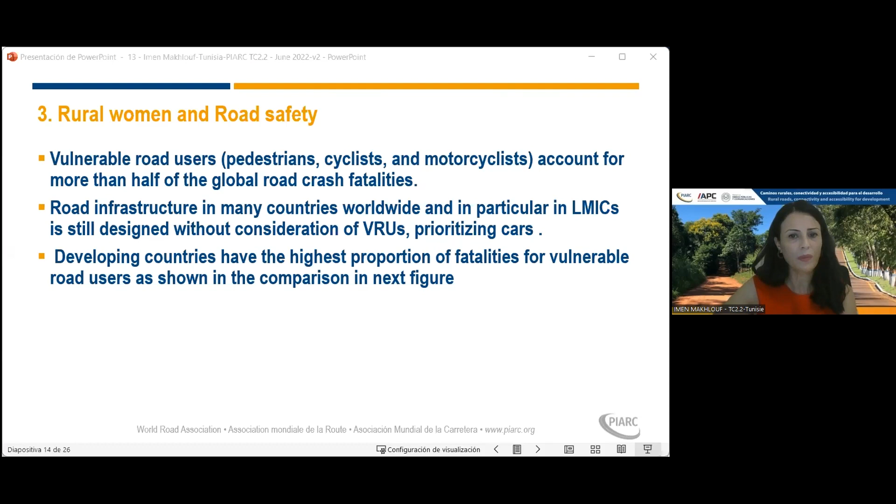According to research, women are also particularly vulnerable to injury and fatality on unsafe roads, as they are often traveling by foot or are passive passengers in vehicles rather than driving themselves. Therefore, they are more exposed to danger as compared to women in high-income countries.

Women are 47% more likely to be injured from road crashes, according to United States research. Women are 17% more likely than men to be killed in a road crash.

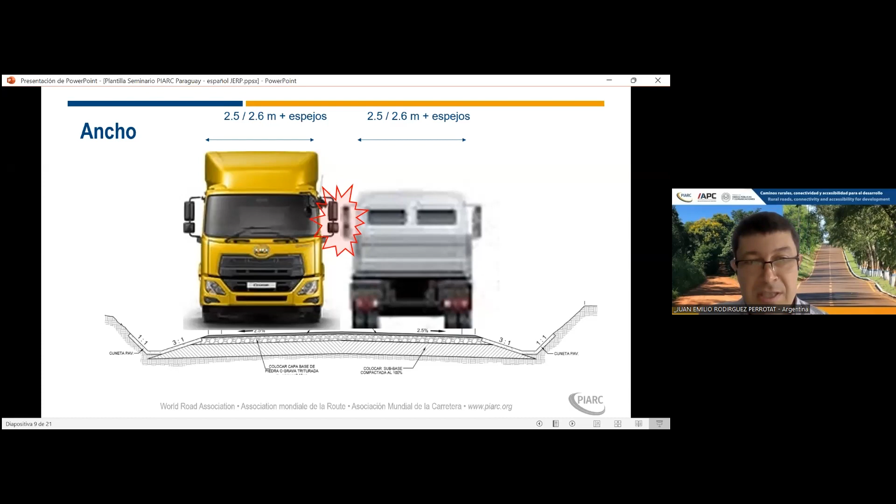Here you have some examples from countries in Latin America, situations that I was involved in. Here we were considering a cross-sectional approach, and we're talking about a road where we have cattle transportation vehicles, and what happened was that the widths were not adequate, especially, for instance, if transportation took place at night, dimensions were not adequate. This was also made worse by the side slopes.

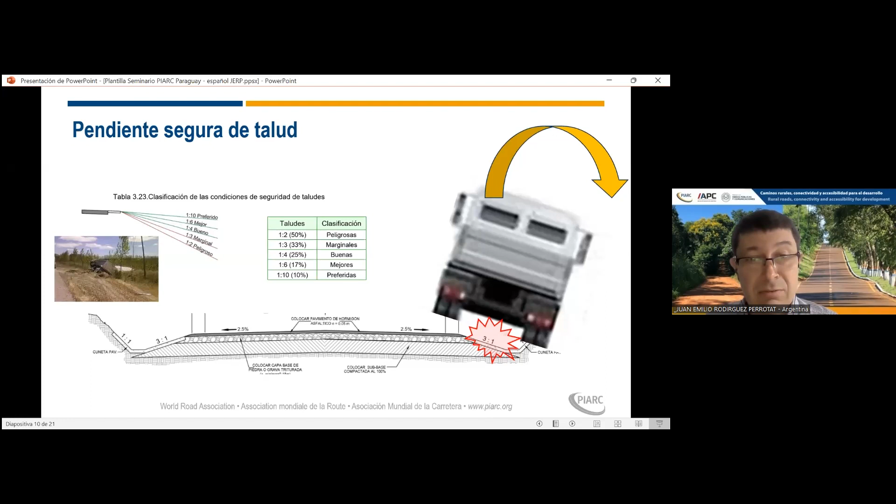Not only do we create a risk for life, but also a possibility of damaging the goods and the loads. So here we have an opportunity to improve our roads and prevent these situations from happening.

Eamon also talked about this, that in many cases this is the only way that rural populations can go from one place to another. These are some images from countries in Latin America. Some people walk along the sideways and the side slopes, and in some cases they are paved roads, but in other cases they aren't.

Sometimes designers don't take into account that people may use those side slopes, so there is a higher risk of being run over, especially at night. We need to work with people because they don't always wear the most appropriate clothing or walk in the safest way possible. So we have to be proactive, and through our designs we need to reduce the possibility of these accidents happening.

This is another project I took part in, in an indigenous community in Latin America. There was a rural road being improved, and we had to take into account that aside from motorcycles, vehicles or bicycles, we would also have people riding horses. So we had to consider if the side slopes or surfaces were appropriate for riding horses. There are also animals on the run, whether native or wild animals, or those belonging to cattle farms. We have to take into account the risk level these animals pose, especially at night.

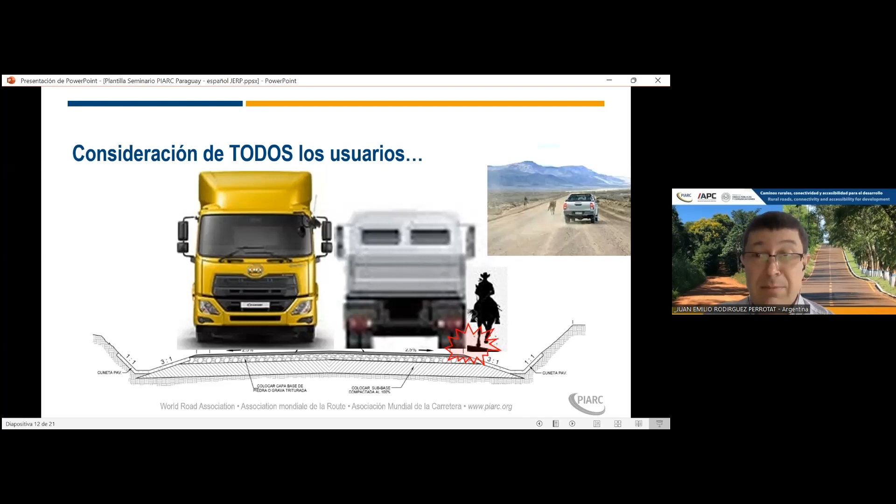And in fact, in Argentina, unfortunately, we've had this kind of situation happen.

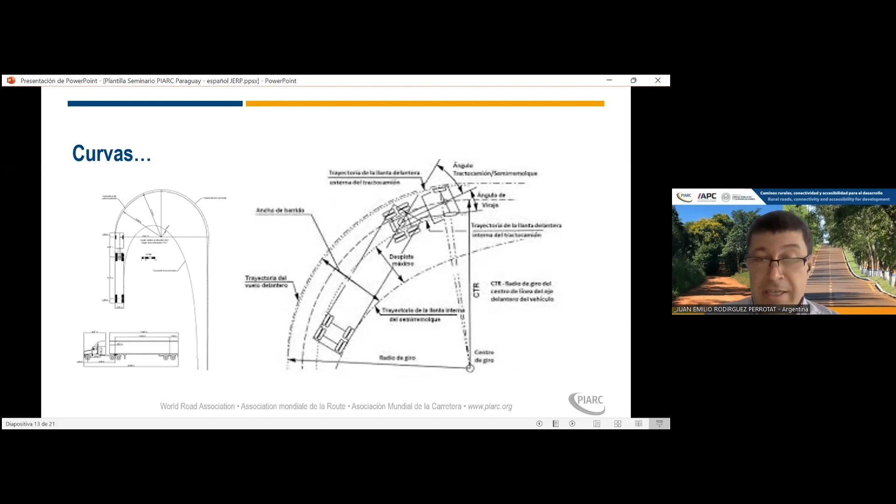Another important aspect, which I won't delve into deeply since I understand you'll cover it in another session, is that we need to take into account all kinds of vehicles. If we're going to have heavy goods vehicles or trailers driving on our roads, especially in productive areas where we have cattle that need to be transported, or coffee beans, bananas, or other produce, we need to take these aspects into account.

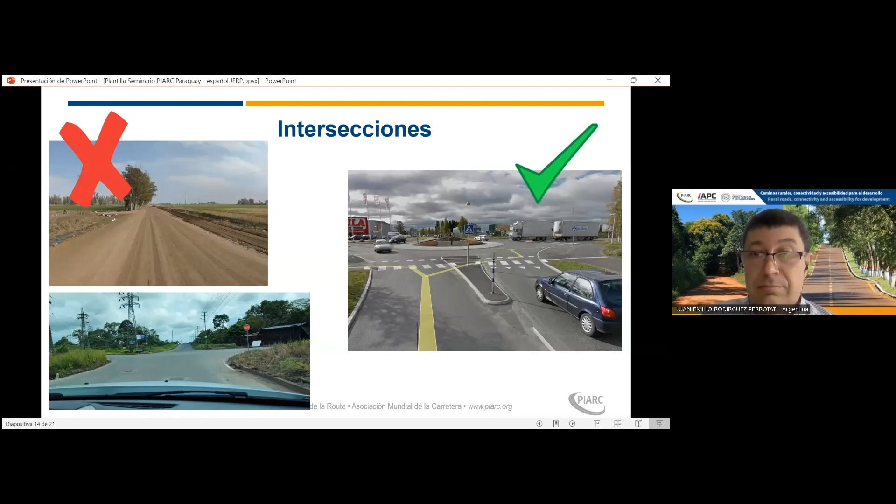As a road engineer myself, I say this as a reminder to myself too: we need to pay more careful attention to design so as to take a proactive role and make roads safer. I don't know if we'll eventually reach a situation like the one depicted in the second picture, but it's something we should strive towards.

Another situation that has led to traffic accidents has to do with the cross-sectional area of bridges, where we may not have good visibility and can't see if another vehicle is coming the opposite way. This situation is made even worse if we're not driving during the day, but at night. And if we also have people walking on the bridge, we're adding more factors that can lead to a traffic accident.

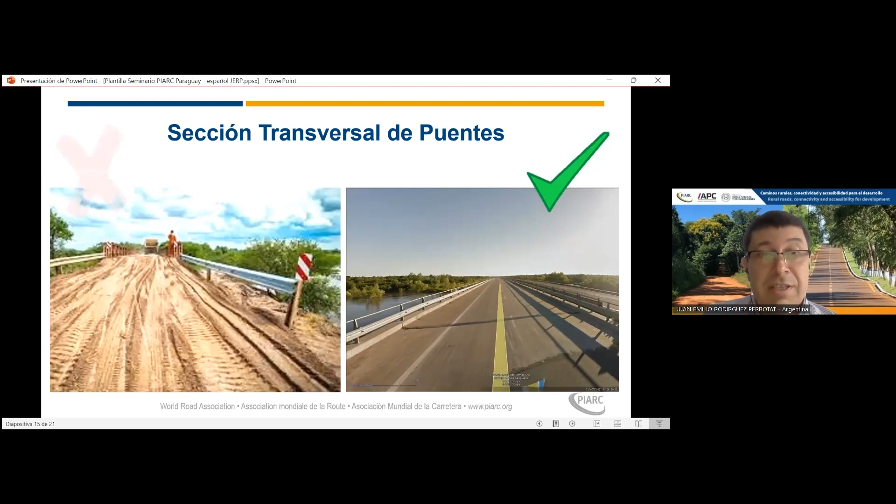Eventually, we should get a situation like the one on the right-hand side. Here's another example, these are all from countries here in Latin America.

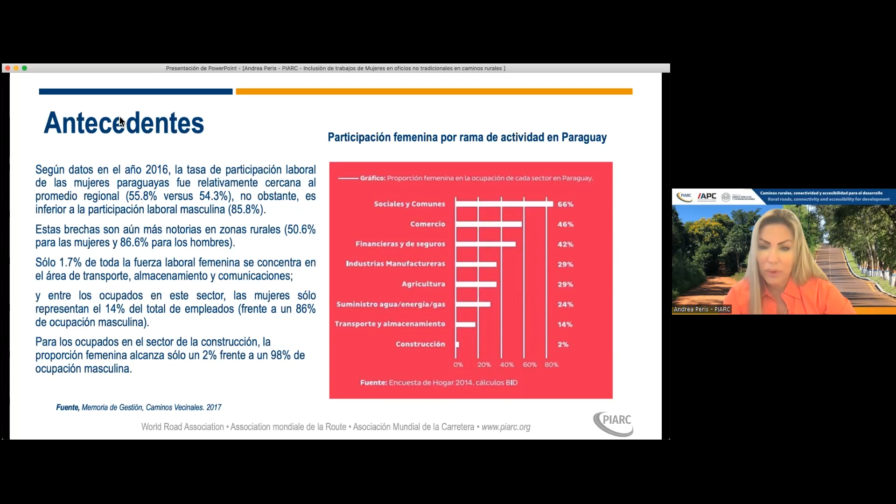This was in 2016, and the latest survey had to do with research by the IDB in 2014. Let me tell you also that 37% of women at that time did not have their own income, versus 19.6% of men in those conditions. In rural areas, the proportion of women without an income reached 42.4%. These figures are really significant because they show what the situation looked like when we started the pilot plan.

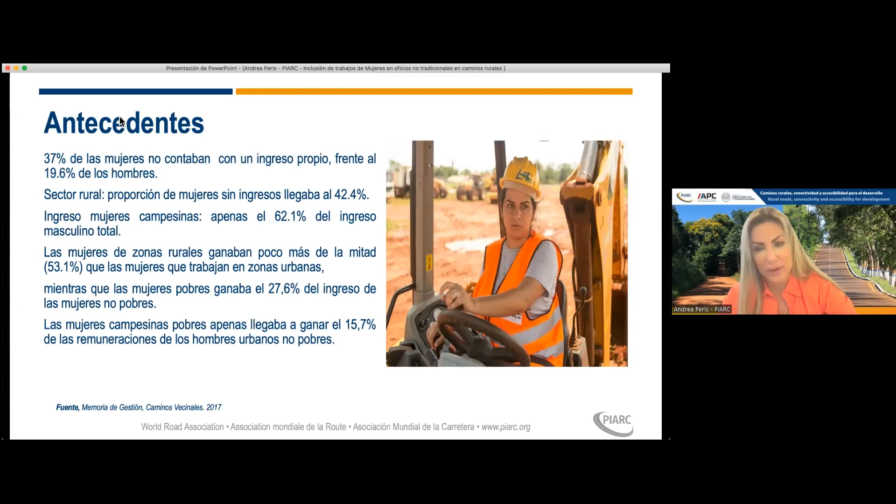Income for rural women only reached 62.1% compared to male income, and women in rural areas made 53.1% compared to women in urban areas, while especially poor women in rural areas only got 27.6% compared with urban income. Now let me tell you about the location of our project and the sample.

We have Paraguay, one country in South America. Paraguay is the heart of South America, and this green map is the eastern side of Paraguay. The main characteristics of this region made it possible to choose it for the PR-L1084 program by the IDB.

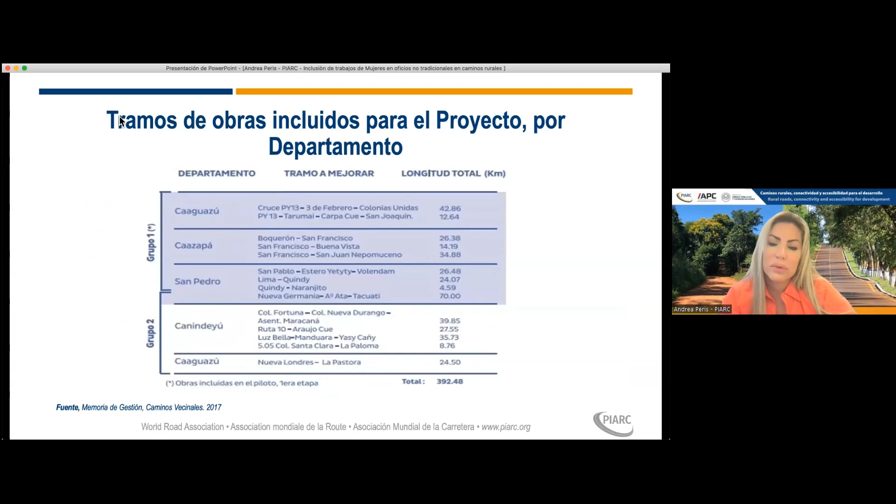Group one in this project had 6 regions, and the blue lines show the departments in Paraguay: Caazapá, Caaguazú, and San Pedro, which constitute the 3 departments with the highest incidence of poverty in the eastern part of Paraguay. Here we can see some of the parts and stages in the project. These 3 departments are the ones in group 1, and the other 2 are part of group 2, amounting to almost 400 kilometers.

To give you an idea of what the project was about, this is a scale project that was implemented bringing new ideas referring to inclusion of women in non-traditional jobs.

It's important for me to mention the general objective, which has to do with fostering participation of women in non-traditional jobs, especially construction and maintenance of rural roads in Paraguay.

Among the specific objectives, the first one is to generate knowledge and increase participation of women in non-traditional jobs generated because of the construction of rural roads, through funding that enabled training also through the IDB, and also establish specific strategies to raise awareness and debunk myths.

That have to do with gender stereotypes that were prevailing at the time regarding the division of roles. In 2015, we had the preparation and diagnostic stage in order to assess the value chain of the transportation sector with a gender perspective, taking into account different organizations like the Ministry of Public Works, constructing companies, different participants, stakeholders and workers.

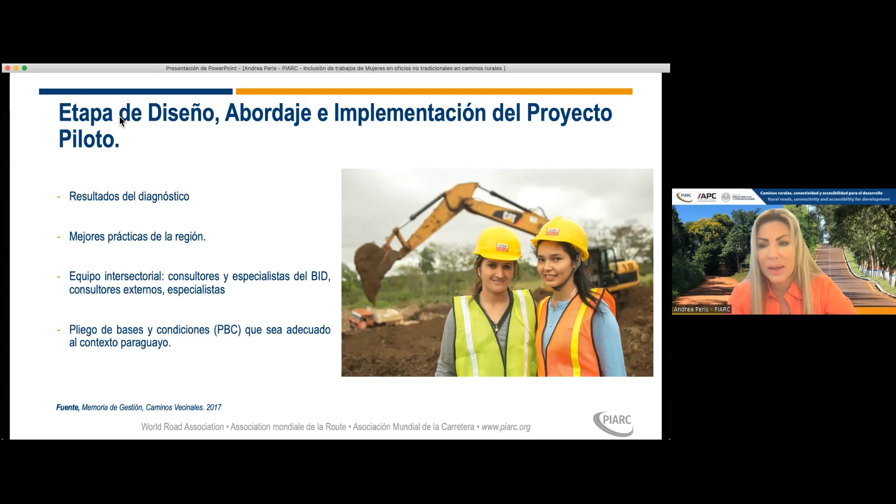And we prepared the specifications with the conditions for what was needed for the project, including some of the aspects mentioned here. For example, number one was a specialist with a gender perspective for hiring personnel.

This is a very important point because these people were responsible for making those worksite camps more adequate for women, with areas specifically developed for gender equality and women inclusion, and also penalties for workers that would not comply with the rules and standards that were established.

In the specifications, there was training for raising awareness regarding gender issues, especially for the workers living in those campsites. Another thing that was included in the specification was to have

Workshops, training workshops for topics that had to do with gender equality, handling of heavy duty machinery, labs, worksite security and safety. There were internships with pay for women who had already received training to make sure that gender inclusion was made possible. The specifications also included a gender plan at the end of these internships and at the end of the works.

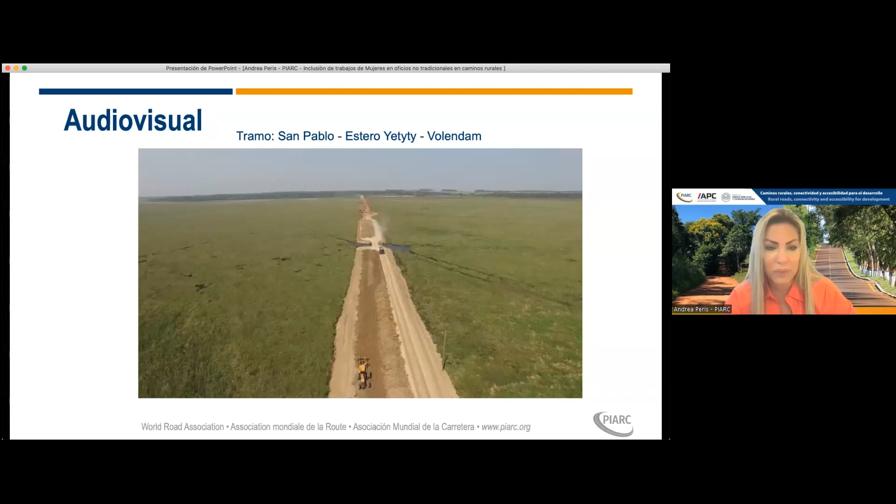I would like for you to watch this video that was prepared by the IDB and the Ministry of Public Works, which were the main sources helping us prepare this presentation. This is a video that compiles some testimonials for you to appreciate what the pilot plan meant.

This is an improvement program for local roads. One of the women says, I love doing everything that has to do with heavy machinery, and I have always liked machines since I was a little kid. I am not afraid. I want to go onto this machine on a daily basis.

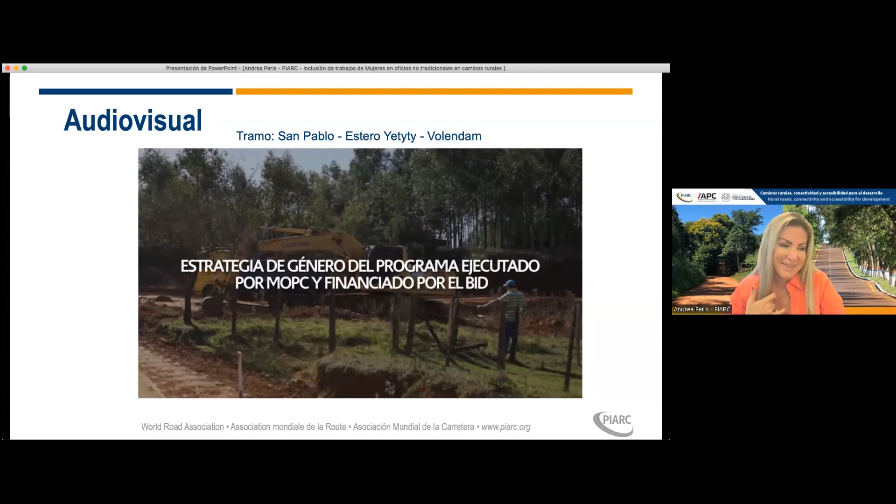On the first few days, people were scared, especially men around me, because they saw a woman in this huge machine, but they got used to it because we started working together.

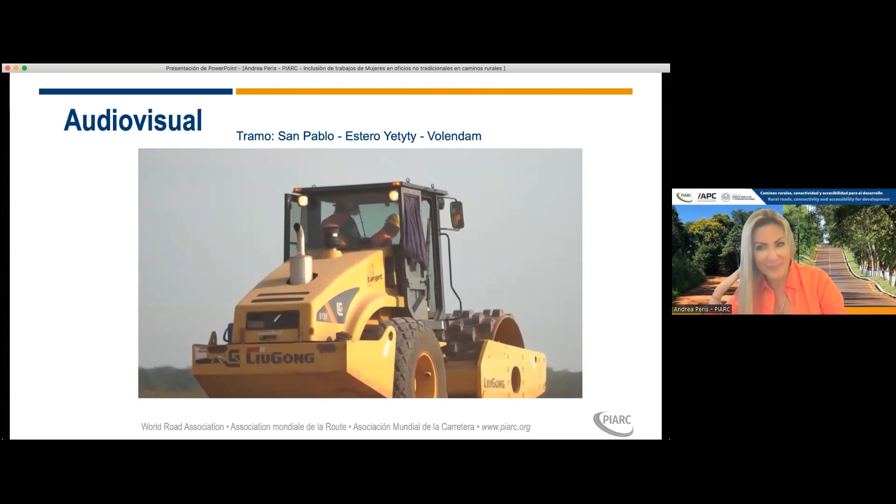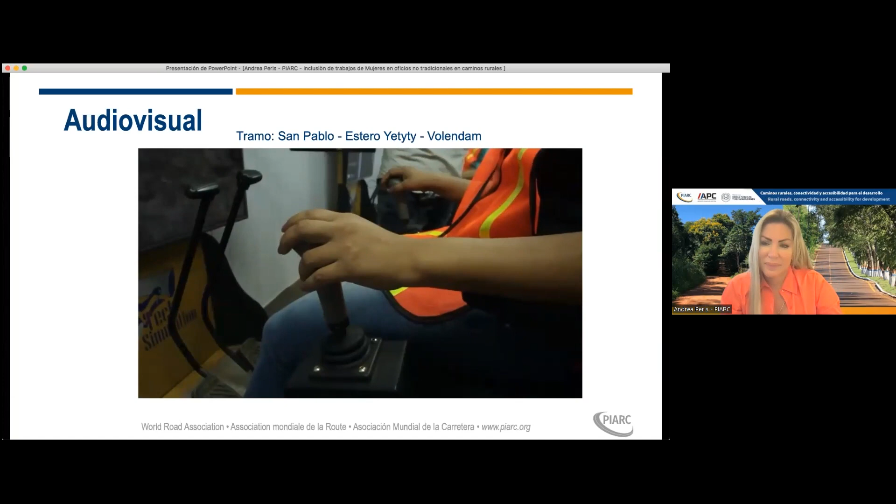Regarding the gender strategies to increase participation in non-traditional jobs by women, he says it's important in a road project. There are many jobs, and it's not complicated. It's just an issue of wanting it to happen. Training of participants was done through a professional promotion alliance.

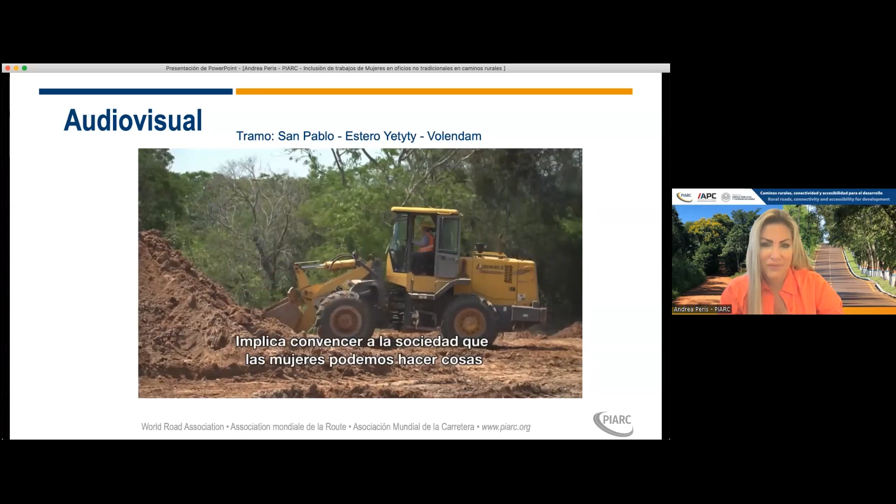Women who were selected had a 5-month internship, and one of them says this was a very enriching experience for me because I think few of my colleagues have this kind of opportunity to work on this kind of project.

We need to tell society that women are capable of doing traditional things and non-traditional things. We can stay home and take care of the children, but we can also work outside the house.

It's different if you see the group of your usual colleagues, but when you share with women, it's a different way, it's a different motivation.

I want them to be proud of me. I want them to say I was part of this in the future and be proud of me.

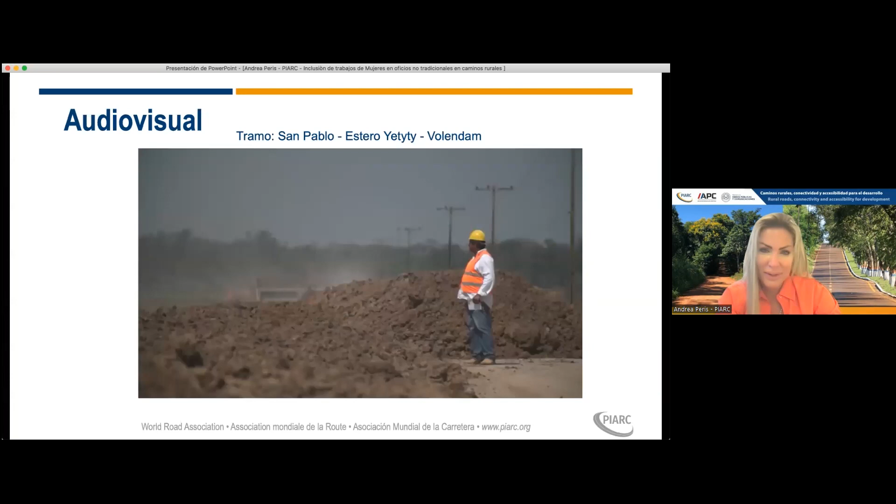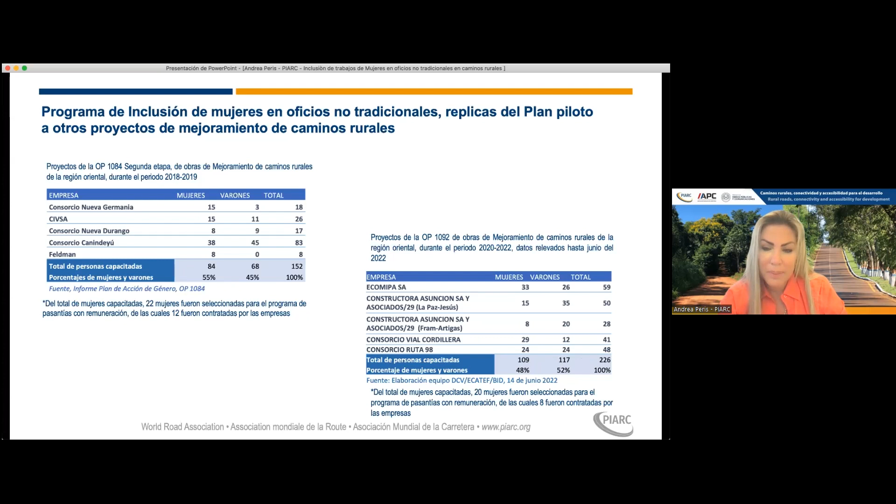We surveyed data until June 2022, serving these companies when it comes to rural roads. Out of 226 people, 48% were women, so out of 226 people, 109 were women.

As a result of this pilot project, we managed to implement the pilot plan to include women in non-traditional jobs. We widened the offer for women trained in road work. We fulfilled or complied with all the indicators when it came to the number of courses, the hours, and the number of people trained.

We reached our objectives, and we also used this experience and applied it to other programs to improve rural roads.

We also tried to foster skills development, to promote equal opportunities between men and women, to include this project of sustainable development in our governments and different local municipalities. We also worked with this idea of equal opportunities in all trainings and in different business and training camps.

We also made broadcasts on TV.

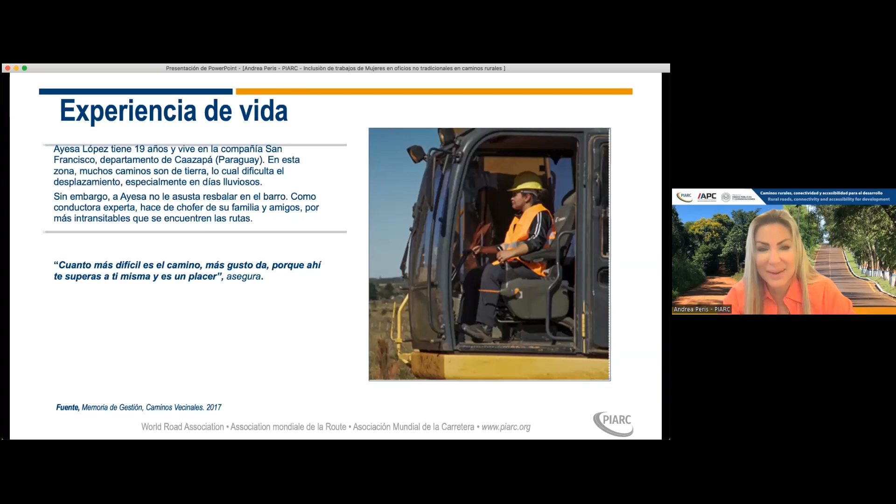Nonetheless, she says that the harder the road, or the harder it is to transit that road, the better, because she has to face these harder challenges. For her, it was incredible to know that her parents listened to her speech on the radio. They were even happier than her.

In the training, she was taught to use or handle a hydraulic excavator. At first, they experienced a simulation, but they learned to handle it. At first she said, 'What the heck is this?' But then she said, 'I have to do it, because if not, I'm never going to improve and be better.'

This is an opportunity that in Guarani means oro kui, like a golden opportunity, a one-time opportunity. After 3 weeks of training, Ayesa and all her partners are already handling real excavators.

She was the first one to try it, and she felt the machinery move. She was shocked at first because everything seemed really hard, but then she was able to handle it thanks to a great and patient trainer and instructor.

These are two testimonials from two people that were key in implementing this. Christian Lezcano, a coordinator for the Neighboring Roads project for the ministry, said that through this training, the program seeks to improve people's quality of life by creating development opportunities. With this initiative, they are promoting a positive social impact on rural areas, which at the same time contributes to economic growth of vulnerable populations.

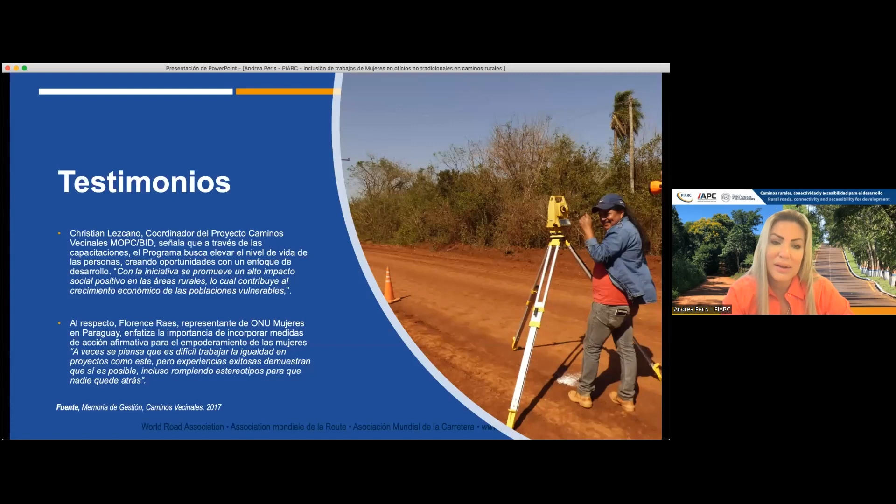Florence Raes, a representative of UN Women in Paraguay, also highlights how important it is to take action to empower women. She said: sometimes people think it's hard to work on equal terms in projects like this, but we've had successful experiences that show us that it is possible, and we can challenge this stereotype so that no one is left behind.

Andrea, we are running out of time. It's been excellent, but if you can please conclude the presentation.

Yes, this is the last slide. By analyzing the experience we've had with this program, we realized it was key to take into account all the opportunities and improvements made in rural roads, and all the programs that were part of the development projects in Paraguay. This was key for all the improvement and pavement or paving projects in Paraguay.

In Paraguay, we are also considering programs where we can incorporate women as labor in different design projects to improve rural roads. Of course, this context varies according to the country, but if we take a look at the records, and by systematizing all of these, we were able to replicate this experience in other countries.

So I thank everyone that I mentioned at the beginning, and this is the end of my presentation. Thank you very much. There you have all my contact information if you want to reach out to me on Twitter or on LinkedIn. I'm open to any kind of question. Thank you.

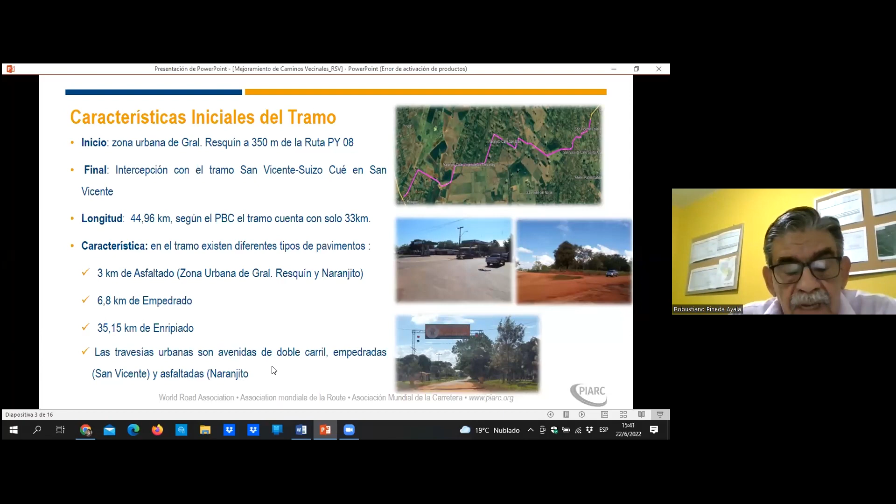It was 2 lanes, and the initial characteristics had to do with or can be seen in this picture. Then you have the design parameters that were established in the specifications. The minimum curve radius was 250 meters, but it was not respected according to the instructions that we received from the road department.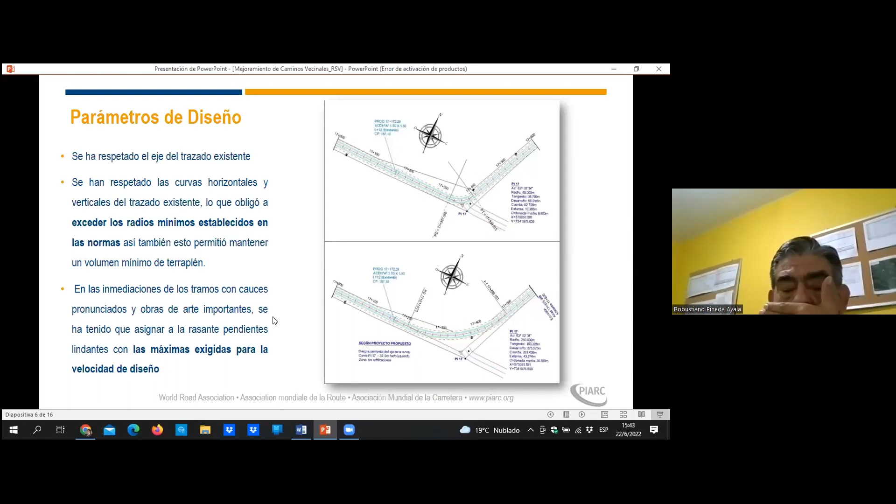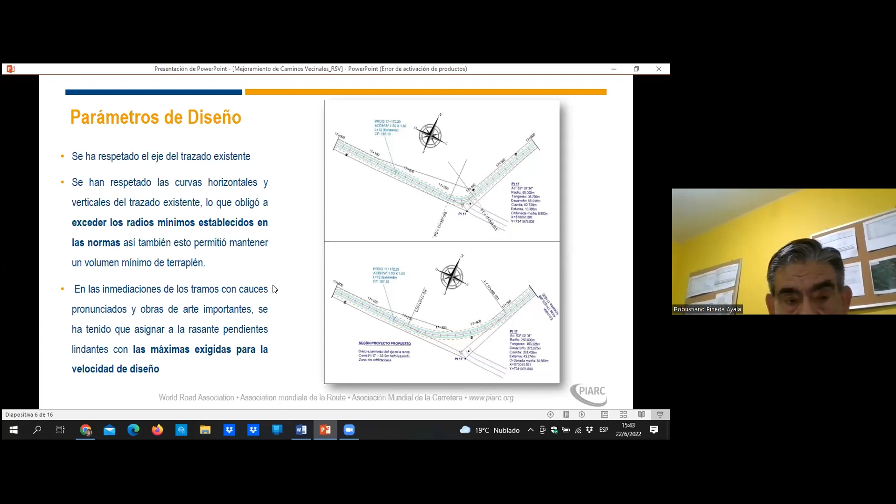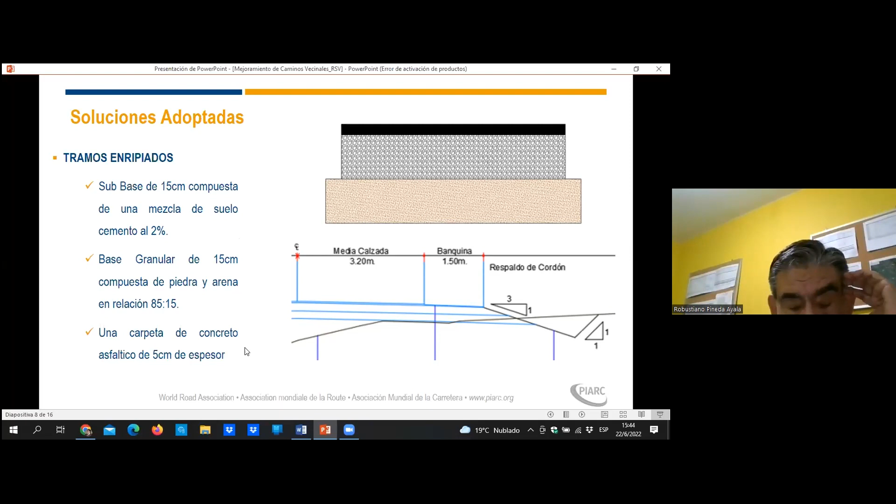The subsurface had to do with the design according to the design speeds. The surface was 5 centimeters of asphalt, and in the ones that were cobblestone, it was widened with a different type of stone, which was a solution adopted so that the material in the extension was the same as the existing material. There was an asphalt regularization for 45 kilograms per square meter and asphalt concrete also. The subbase for the gravel area was 15 centimeters with cement at 2% and stone and sand in a proportion of 85-15, and there was an asphalt surface of 5 centimeters.

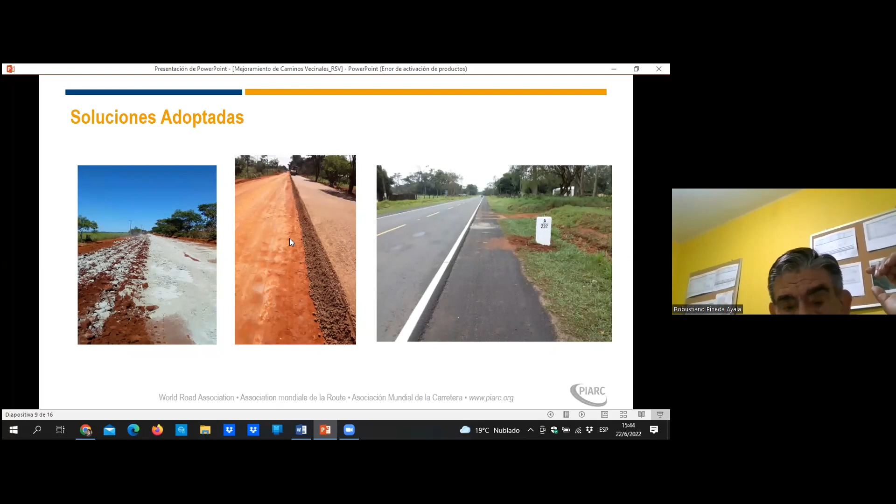Here you can see the solutions that were adopted, the subbase or the subgrade and the pavement. One of the points that had a lot of repercussions in social networks, you can see here how the community showed their satisfaction because of these works.

In that sense, the works ended with 45 kilometers of asphalt paved road, which improved the quality of life for 15,000 people, and it enabled population to access basic services. This also meant improvements in the homes adjacent to the paved road with more stores, which had a positive impact in the population.

Final costs, according to the different items, amounted to $263,000 per kilometer, which is quite affordable, quite reasonable, according to the specifications and demands from the ministry.

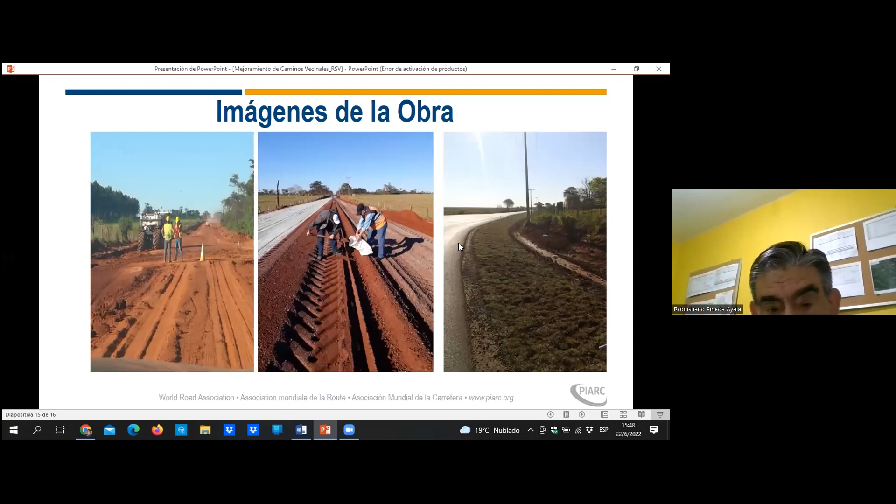I want to show you that it's almost adjacent to the fences, and the right of way is really narrow. Here you can see in each of the pictures that the fences are really close to the works, and you can see what happens with the curves.

And with that, I finish my presentation. I want to thank you for your attention, and I'm available for questions.

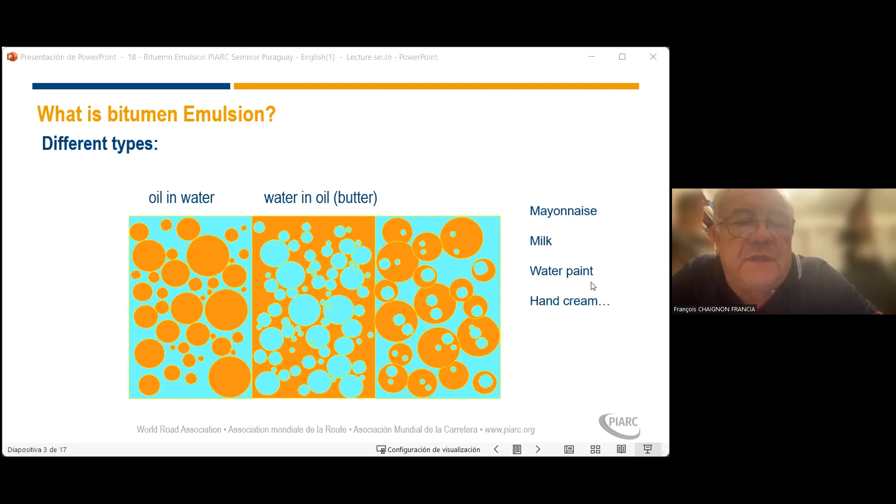Next, please. So what is the composition? I think you have maybe another one to push. Yeah, thank you. Sorry about that.

So more important, I was talking about surfactant. That means around the micelle of bitumen, the black micelle, the surfactant will help give a positive charge, for cationic emulsion, around the bitumen. So every micelle of bitumen will have a positive charge. That means the emulsion will be stable in the tank because you've got electrostatic repulsion, which prevents every micelle from touching each other. So this is the importance of emulsion.

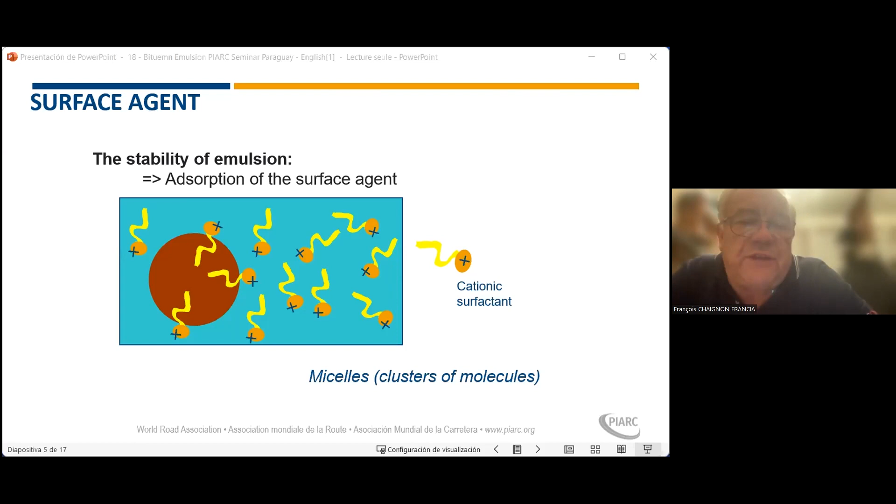We're going to look at certain characteristics of the emulsion on the next slide, please. The good thing about emulsion compared to bitumen, cutbacks, or flux bitumen is that we can apply them at lower temperature, between 30 to 80 degrees. 30 degrees will be done for cold mix. We're able to make cold mix either for road maintenance or even for paving.

We do cold mix for paving now. And 80 degrees will be mainly for surface dressings or chip seal, as they say in the US, in order to have fast evaporation of the water. No VOCs in the air, that's quite important compared to cutbacks. Cutbacks are 60% bitumen, 40% diesel, oil, or other things. That part will go into the air, so there's no sense putting diesel in the air with cutbacks. A lot of countries, like Mexico for example, decided to go directly from cutback to emulsion. That was a big switch for them, but it was a way to prevent putting VOCs in the air.

In Europe, CO2 is getting more important. So every time we look at cold mix, this is quite important compared to hot mix, because you are using less energy, and energy means CO2 in the air. So that's not too good.

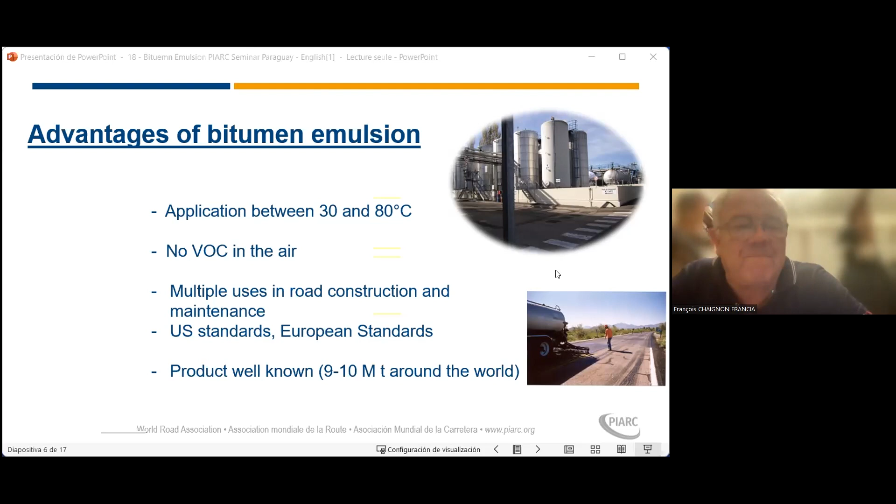So what do we do with bitumen emulsion? We can use it as a tack coat. Tack coat is very important when you apply 2 or 3 layers of hot mix. It's a way to have the hot mix working together, glued together like glue. I think that's the use of tack coats.

We can also use fog seal. They do that quite a lot in the US. It's a way to protect mixes, mainly in hot weather, in order to protect against oxidation of the bitumen in the mix. The other use was with aggregates, so surface dressings or chip seal, like in the US. We're going to look at them. Micro surfacing is another technique.

And like I said, more and more now, and that's something we do in Europe, it's asphalt concrete bitumen emulsion, ACBE. That's a standard we have in Europe now for cold mix done with bitumen emulsion, used for repairs, but also for paving, as base course. In a lot of low and medium traffic roads, we're able to reinforce the pavement with cold mix, and that's a nice way to do it with a grader. It's a very nice technique - we're able to reprofile from 0 to 20 or 10 centimeters in order to have a nice profile of the low traffic pavement. Next, please.

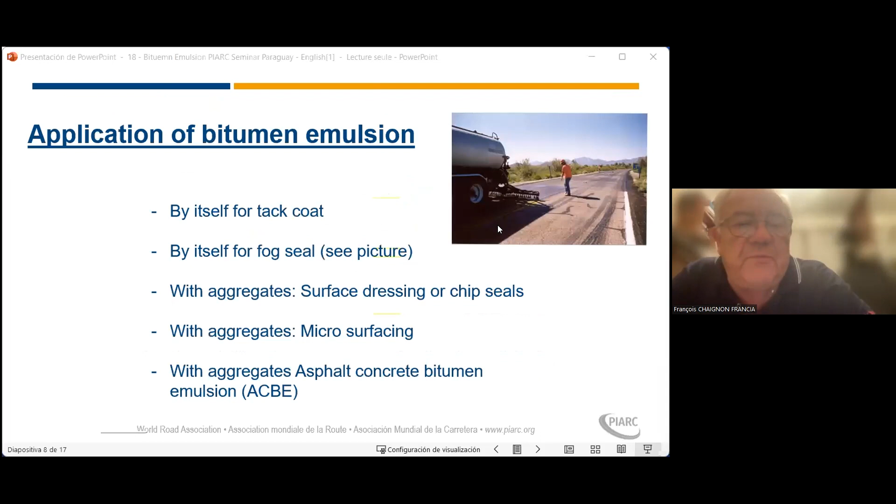So I'm going to look first at the importance of road maintenance. You have to go next, please.

So usually we think this is important even for rural roads, because even if the traffic is low, you have some maintenance to be done. On paved roads, surface dressing is the cheapest technique to maintain the road network, and it gives good skid resistance for the safety of users. So it's important to stay in the green, because as soon as you go to yellow or red, costs will go up, and that's not very good.

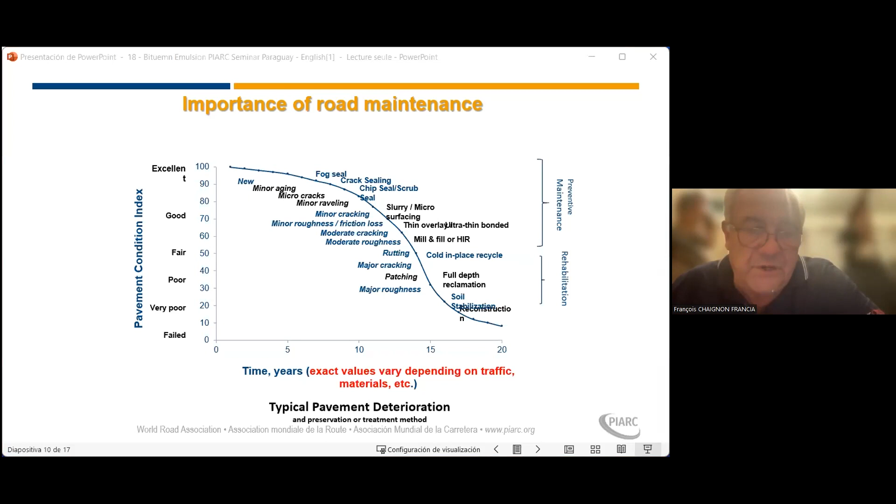But I think all those different techniques are linked to the way people look at road maintenance. And the big issue we have all around the world right now is road maintenance is not very interesting for political people - they can't cut ribbons, they don't see too much what's going on. But I think this is quite important for the road owners, because it's a way to preserve the money that's invested when you construct the road. Next, please.

So two techniques we're going to look at very quickly. The first one is surface dressing. We call that surface dressing in Europe, and chip seal in the US.

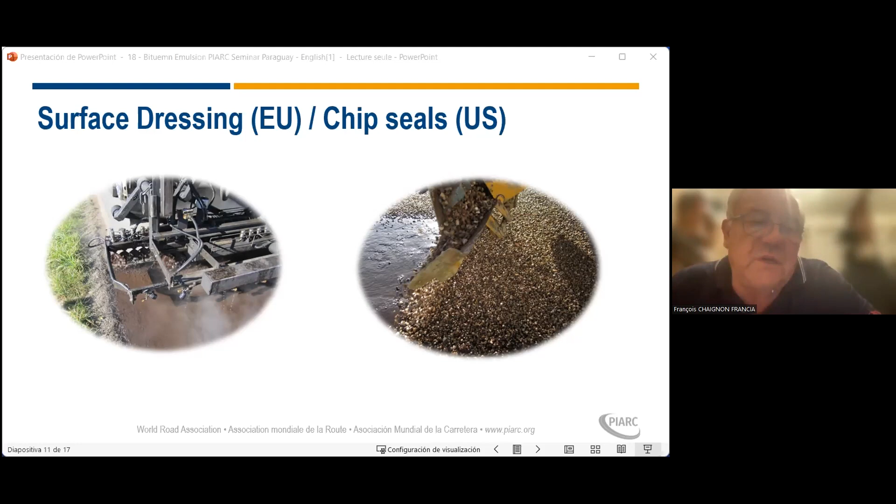So we apply bitumen emulsion - you can see the bitumen emulsion on the left is brown because the emulsion didn't break yet, there's no separation between the water and the bitumen. And on the right, we apply the aggregate on top of it. This is a very simple technique, nothing on the structure, only on the surface, in order to give imperviousness and skid resistance with the aggregates. Next, please.

So this is on the right, the normal process. You have to clean the pavement before you do that. You apply the emulsion, you apply the aggregate, you compact the whole thing. You be very careful with the safety, the signs and everything in order to have a good safety job site. We travel a lot around the world, so I think it's quite important to have good safety on the job site also.

You can do single dressing, double dressing - that means a lot of different things are done depending on the kind of pavement you have to deal with. A lot of documents look at what you have to do, what are the best techniques, depending on the traffic, the altitude, the weather, the climatic conditions, and everything.

So this is surface dressing, the cheapest technique. In France we do around 150 million square meters of that. In Europe it's a very well-known technique, in the US also. I don't know too much about South America because I didn't work there - I worked in Canada and the US, but not South America, sorry. But this is a very common technique and very well used around the world.

Next, please. So it's a very well-known technique, used for low and medium traffic, from seaside to mountain areas, cold places to hot places. That's pretty good - you have to adapt the emulsion and the aggregate depending on the traffic and the climatic conditions.

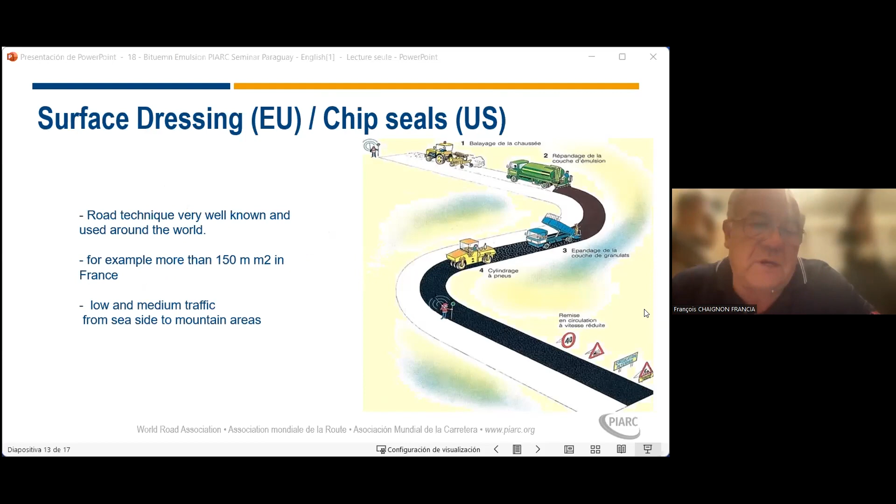Yes, next. Microsurfacing is a different one. Microsurfacing is a self-propelled machine with everything on it - emulsion, water, all the additives. It's a thin overlay, and like you can see on the left, you have the brown color first because the emulsion hasn't broken yet. That emulsion is quite different from surface dressing - it's a very slow setting. We want the emulsion to break after the mixing, after application on site.

And then that's a nice way to apply it on top of a hot mix. Usually it's very well used in cities because it's pretty thin, and that's a way to reduce noise a little bit and to be very impervious.

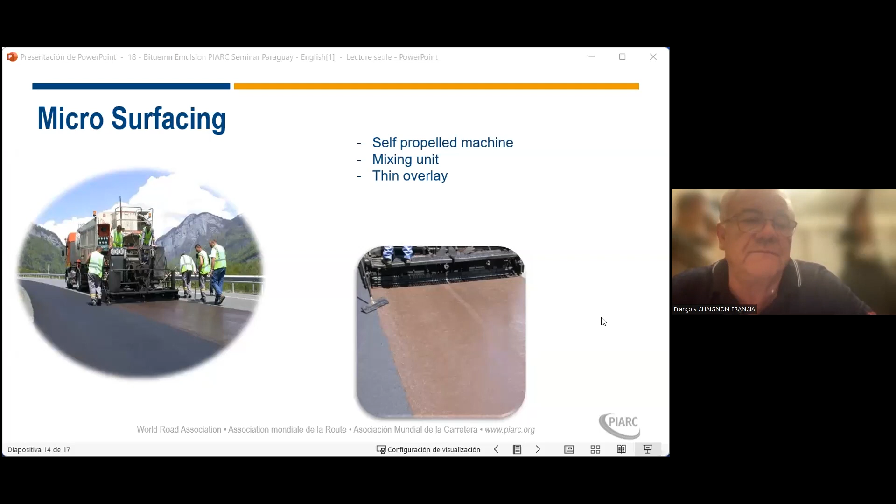Next one, this is just to show the machine. So the good thing about that machine is it's self-propelled - that means you don't need a plant or anything to move everything onto it, so it's an advantage. Everything has to be thought through with the emulsion and things, but that's just logistics. Everything is on the machine and that's pretty well done.

I still insist on that. That's why that's in Spanish, okay? Because I think we have really to stay in the green. Yellow is maybe what you want to do, but red is not what we want to do. And social media will be very bad with you on the red ones, okay?

Cost of vehicles will go up. CO2 will go up also because people are going to spend more gas due to the bad pavement, okay, even if it's unpaved or paved. So I think that's quite important to look at road maintenance the right way, to do some nice plans for the future and not to forget that.

Rural roads are like every kind of roads. We have to maintain them the best way we can with finance, if we can, obviously that's something else. But I think that's very, very important. And that's something we want to really improve on TC 2.2.3, to show that road maintenance is the key for the future, to reduce CO2 and to do a lot of things.

I didn't talk about cold mixes because this is kind of different, more European. But I think cold mixes are also a nice way to reduce CO2 by using reclaimed asphalt pavement, to be able to recycle the pavement in the right way. Okay, next please.

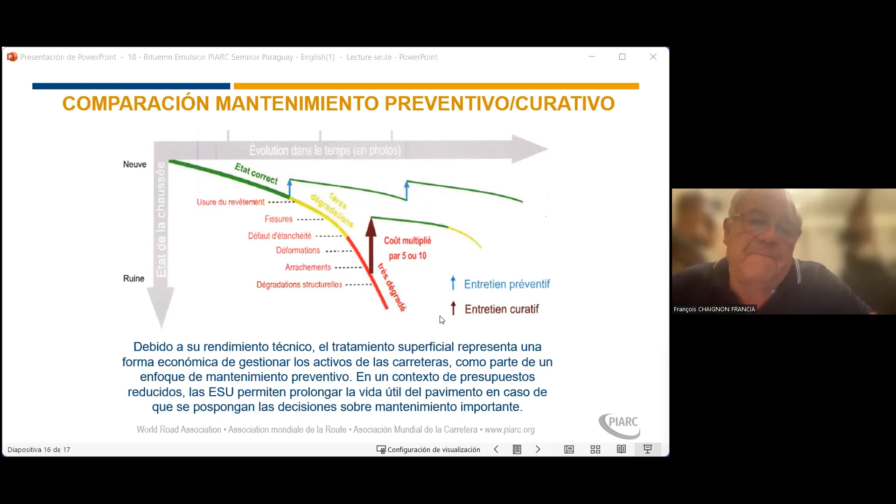I think this is the most important thing for you to remember. Bitumen Emulsion is coming from 1923, so it's kind of 100 years old, but I think that's a very, very important technique to maintain roads. And roads are the first social media. So I think that's very important to keep that alive.

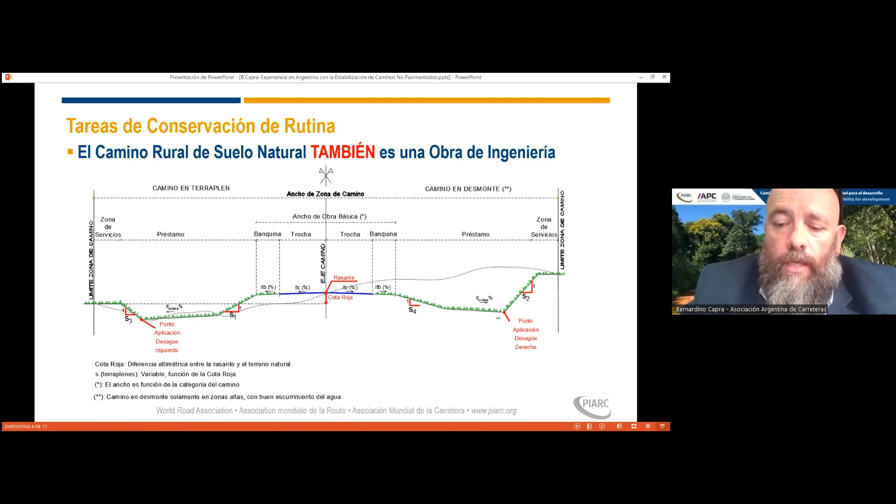It is important to take this into account when it comes to stabilizing a road. You need to consider the geometry of the road, and it's not just a matter of good intentions on the part of the engineer, the ground operator, or the field coordinator. We need to make an effort from the design stage and at every step of the way not to degrade the conditions of that road. Here I'm showing you what I mean.

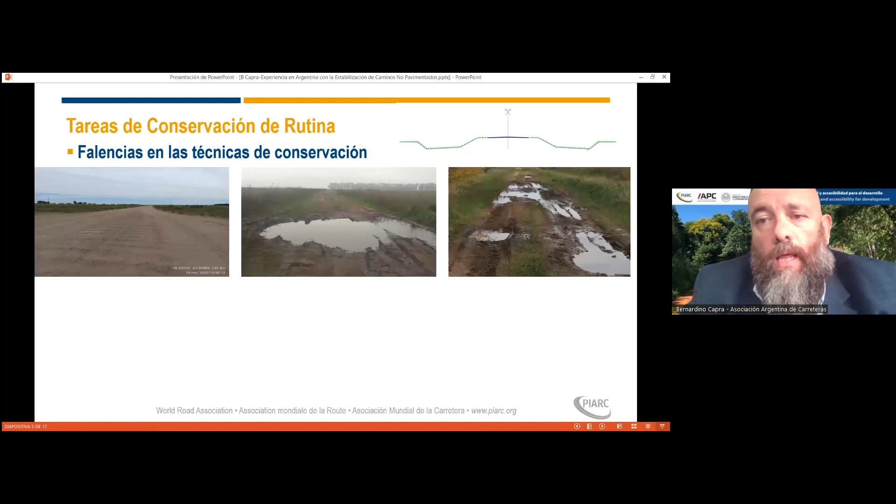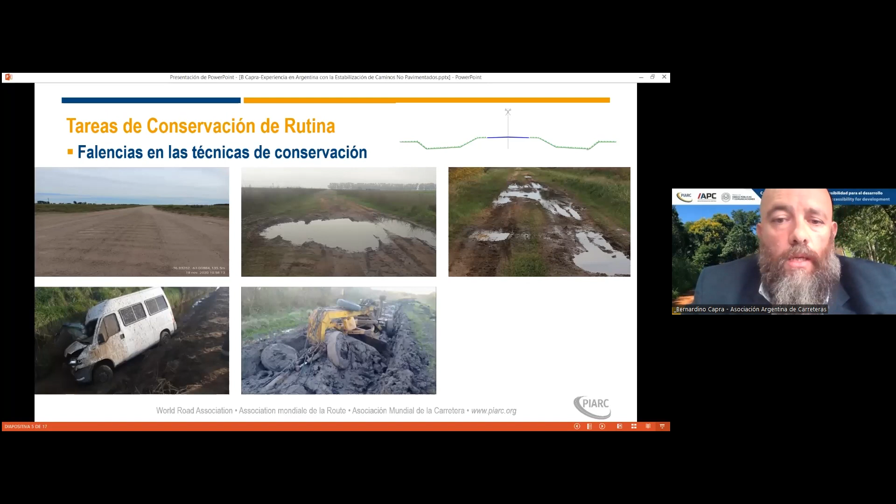This is the profile of a rural road, and these pictures show roads that are very poorly maintained. That is to say, there's bad runoff, shoulders that are above the surface, and bad use of the soil. In the picture with the crash, you have a case of bad use of the soil, which is in detriment of safety.

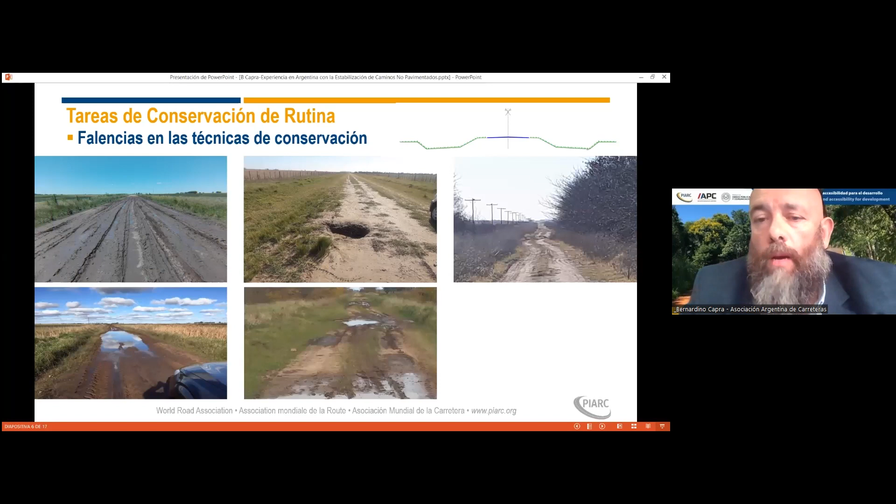Then you have another accident with a piece of equipment. The other one is excess load in the truck, rutting, potholes, and shoulders that have no drainage. Again, another example of deficient drainage.

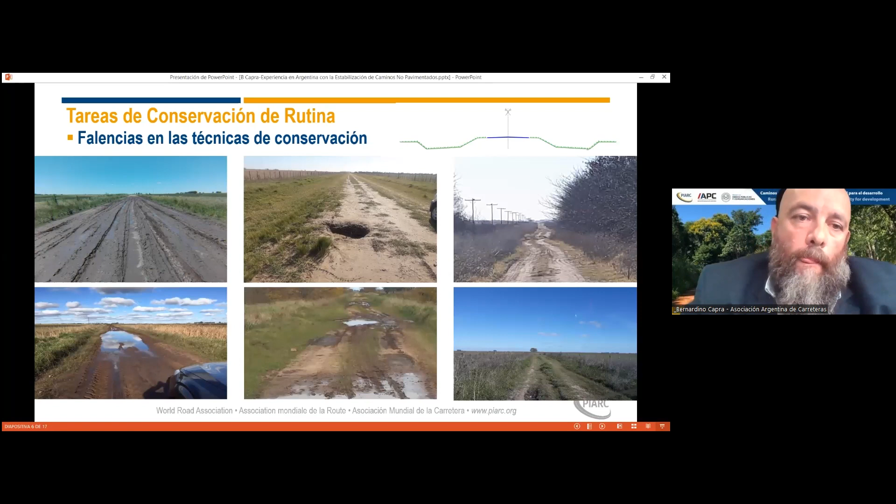I could go on and on describing these pathologies of the road, which are not the case in every road, of course, but we have to take into account that preservation should not go against the road that you're trying to preserve.

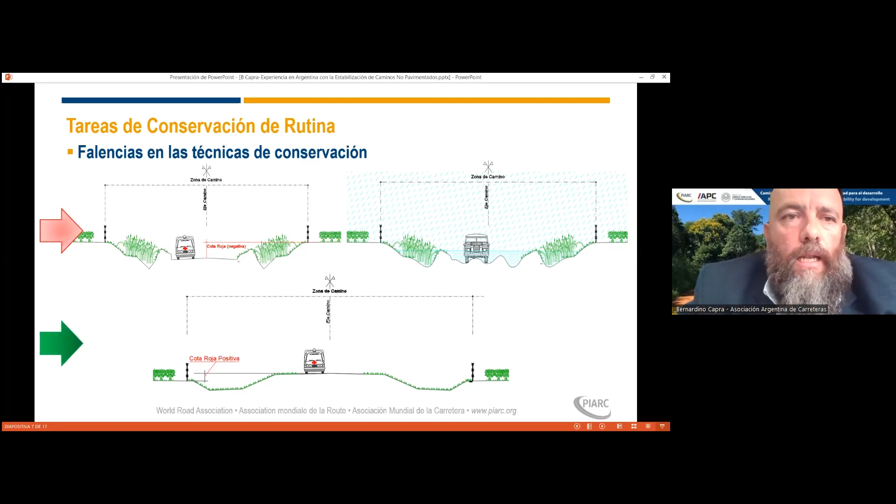The data that we have from the province of Buenos Aires, in Argentina, shows that between the top drawing and the bottom drawing, there's 10% more time of usage for the picture at the bottom, because it is better stabilized and better shaped than the other one.

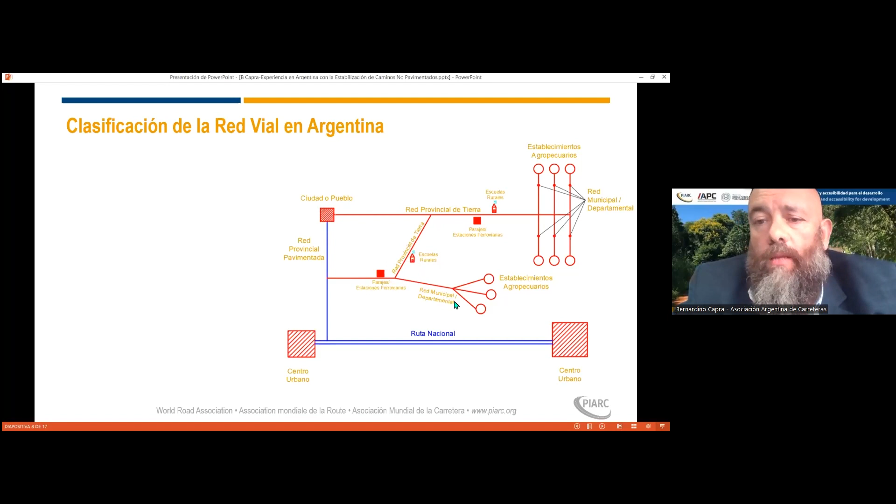Now, if we go to the classification of the road network in Argentina, we have national roads that connect important urban centers, then cities or towns that connect with those big urban centers, which is the provincial network. And then there's the unpaved provincial network connecting stations, and the municipal or local network connecting with different farms, for example.

So we have 85,000 kilometers of paved roads and around 650,000 kilometers of unpaved roads. This number is very significant because in the local network, we don't have a proper inventory of the network. So we can say that 12% of the total network is paved and 88% is not paved.

And out of that 88%, only 7% has been stabilized. So the first conclusion here is that we have a deficit of at least 11% of the provincial network, which is unpaved, which should at least be stabilized.

So we are saying that we should have at least 70,000 more kilometers of dirt roads that are stabilized.

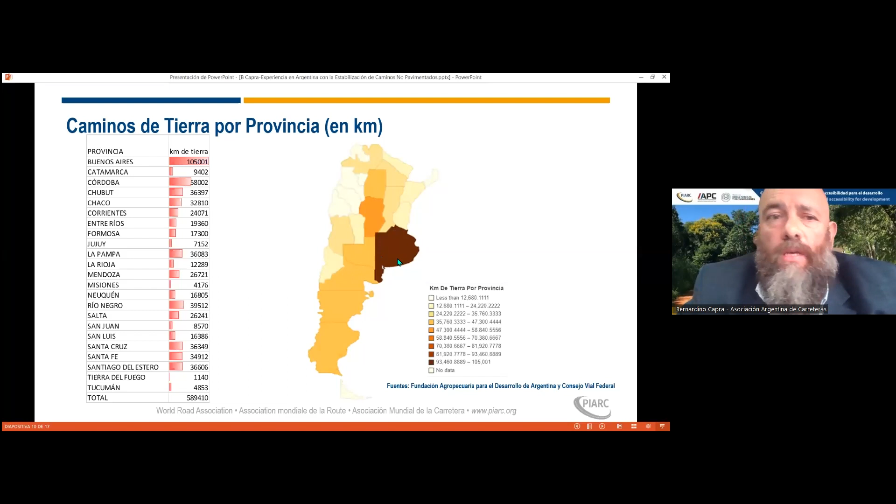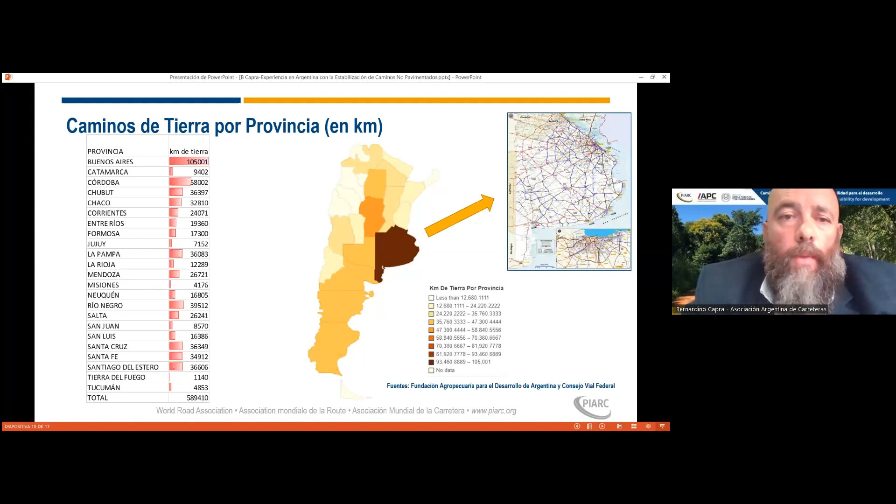They are very heterogeneous, concentrated basically in the central areas. The province of Buenos Aires is the size of Italy, and it's 30% smaller than Paraguay. Here we have 33% of the GDP that is produced in Argentina, so the farming production is huge.

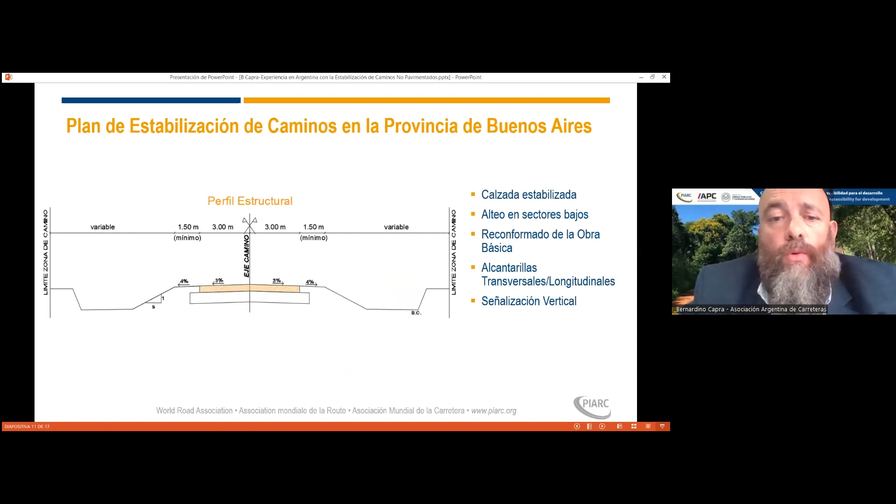The works contract establishes that this is supervised by the Road Association of the Province of Buenos Aires, where I work. The benefits will reach 220 schools, 93 stopping points, and 228 dairy establishments. The total length is 2,300 kilometers, and the total amount is going to be $150 million.

We are a federal country, and each municipality is autonomous, but they will receive subsidies for the purchase of road machinery and gutters plus stabilization materials, for an amount that is around $15 million to date. This is going to generate synergies for the local communities, where people want more stabilized roads, and we are hoping this will be the kickoff point so that we continue with this enhancement plan.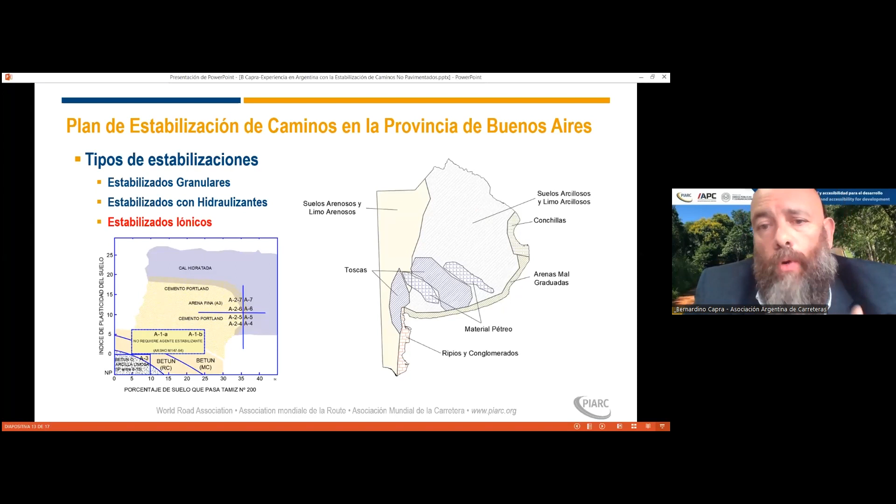Regarding stabilization types, the province has stone soils in the south, sandy soils in the west, and clay in the east. So for each type of soil, we have different stabilization agents, and for better use of the materials and resources, we chose granulated stabilizing agents plus hydraulic agents and ionic agents.

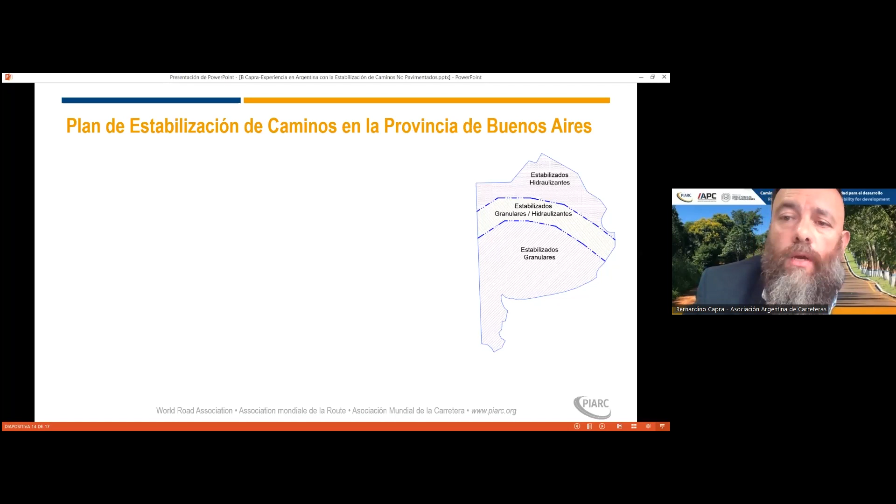The transportation distances—the province is very large, and transportation of stones is very costly, especially during harvest time, because lots of machinery and trucks are used for transportation of grain to the port. A third of the value of the stones used for the works has to do with transportation.

So granular stabilization in certain regions was used with a support value of 60%. We were very lax regarding the specifications to enable the use of materials that are not maybe first quality, that are usually used for concrete.

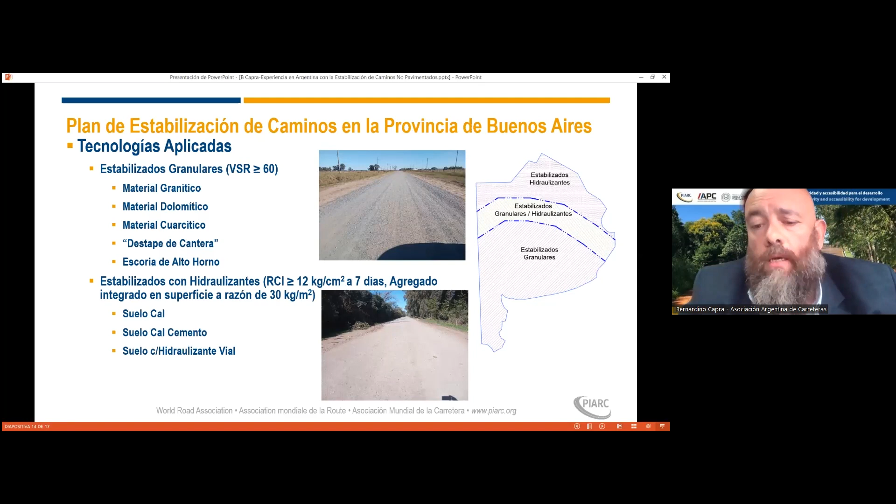Regarding hydraulic stabilization materials, the resistance in the probes is more than 12 kilos per square centimeter, cured at 7 days with water use, which makes the test very demanding to obtain high resistance. It's integrated to the surface with 30 kilos of stones per square meter that are used in the final compacting stage for better roadworthiness. When it comes to materials used in stabilization, it could be lime, cement and lime, or a hydraulic binding agent.

What happened with ionic technologies? Well, we use ionic stabilization in many municipalities. It's prevailing—a technology much more inexpensive than the other two, but we have not conducted acceptance tests. When you contract this kind of works, which is 15 kilometers long, not having the acceptance or quality test did not enable us to include it in these specifications, because the technology measures swelling effects, but we are making progress in putting together control tests.

I want to say that I liked Ms. Peris's presentation, because that's what you need to do: go to the local level and go to the person working on the machine and train them. That has to be our motto, both for the Argentinian and the Paraguayan or any other road association. We need to provide training so that good practices are our bread and butter every day instead of the exception, especially for maintenance in rural roads.

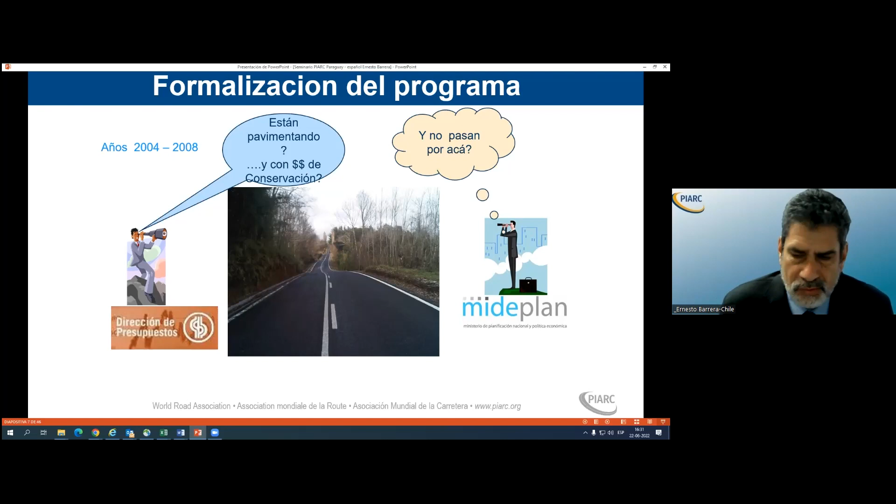So we have a twofold problem in the Ministry of Finance, because the Ministry of Planification and Development felt they were not taking an active role in this program. And by assessing this government program that ended up in an agreement in 2011, it's important to show you this slide.

Because it gave us a framework where we could apply these basic road solutions. A standard change requires geometric improvement, soil movement, sanitation. Of course, the pavement structure also changes, especially when we have heavy or high density traffic.

And we also need to have a comfortable surface. In our basic roads, we are improving the surface. We are reducing preserving interventions. We are not making changes every month. We implemented more lasting solutions. We do not make any kind of geometric improvement that is very specific.

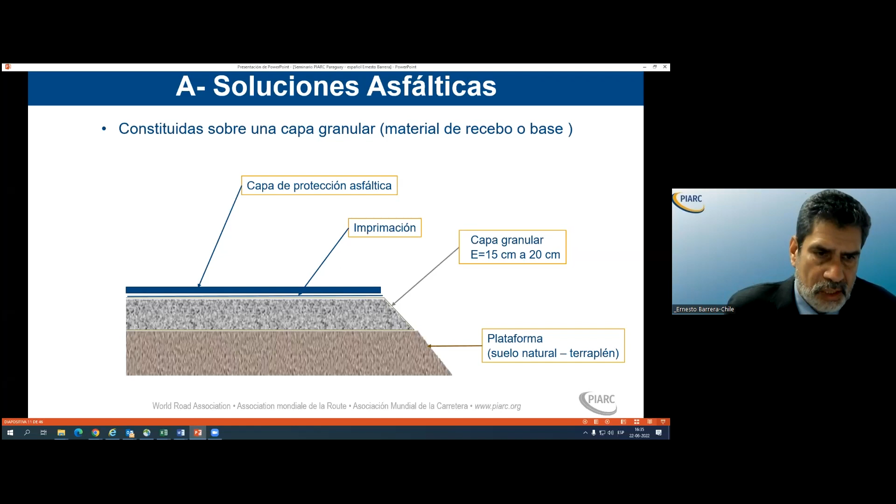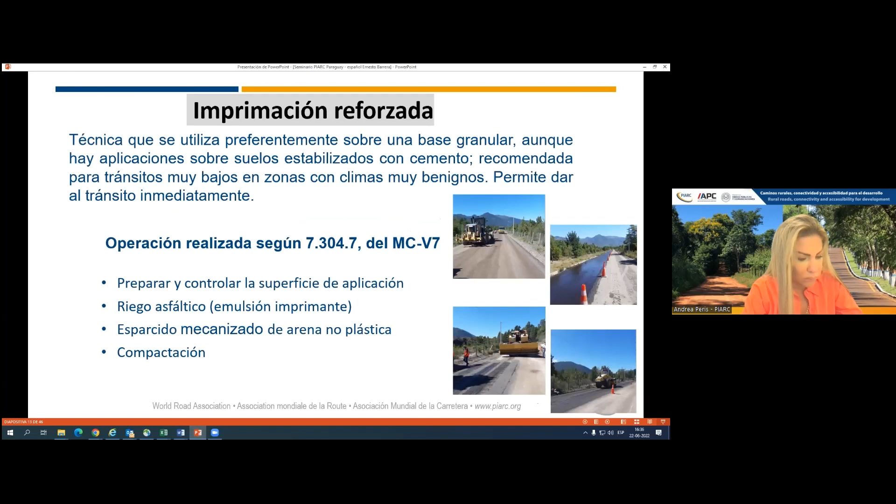Regarding the protection layers that we have, we've got reinforced priming, simple surface treatments, the TSS, the DTS, the Cape Seal, the Otta Seal. We've got the slurry. We've got different solutions, micro paving as well, and other solutions that we can implement.

Here you have a series of recommendations regarding reinforced priming. We use sand. And what we have established in our road manual is the operation that is described, and we specify all the controls for the dosification and the standards that this technique requires.

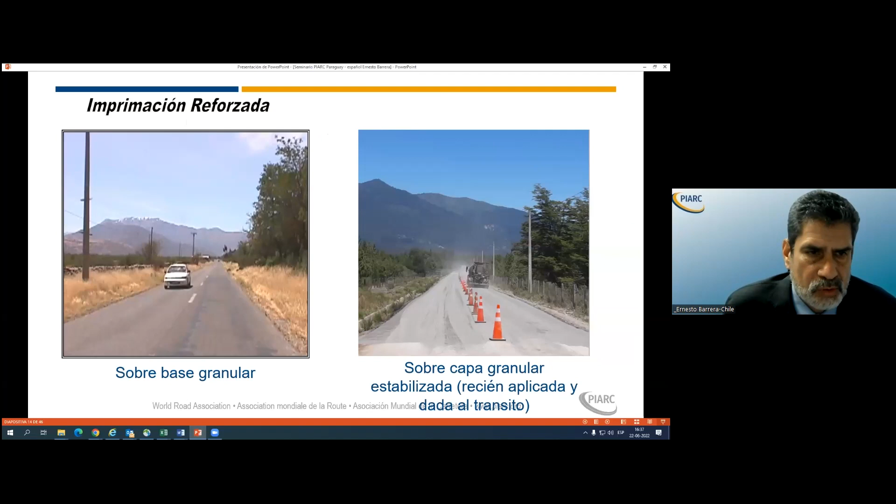Here we have some solutions that may not be perfect, but they have provided a solution for that particular situation. Also for the slurry, we have that operation or technique described in our road manual.

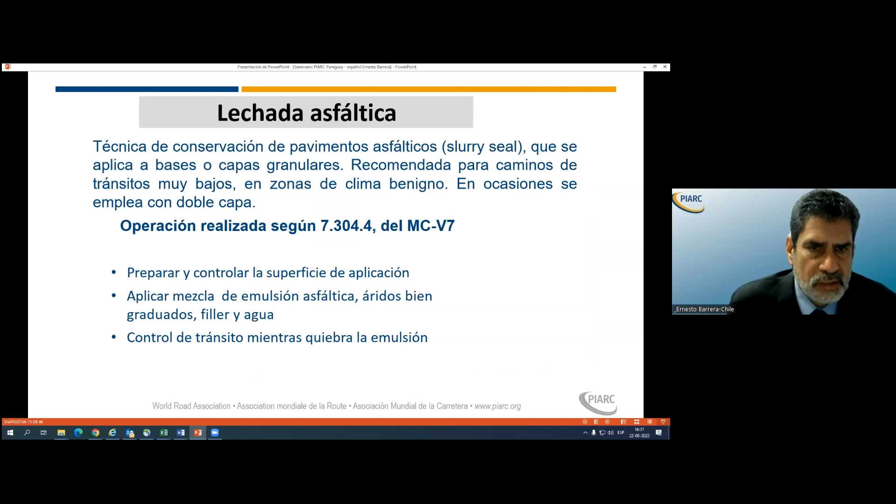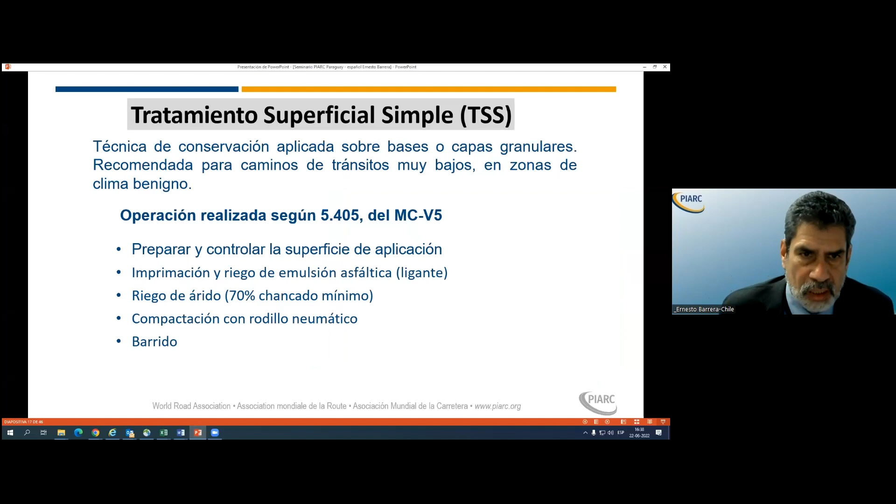We also have simple superficial treatments, explained in previous presentations, using granular material over primer, which is a more popular solution. It's important to have road marks in all of our applications. We also have double surface treatments, also outlined in the road manual volume 5, with all specifications and provided solutions.

Regarding Cape Seal, that is a technique brought from South Africa. It comes from Cape Town, that's why it's called Cape Seal. About 20 years ago, professionals from the road departments went to see what they were doing. They have a double layer with superficial treatment and slurry, which are two different techniques but applied in the same solution. There's an image - the termination is that of a slurry.

And then we've also got the Otta Seal, which has been brought by our experts from Norway. They went to see how it worked and taught us how to implement it. It's for low density traffic, and it's been implemented at a national level.

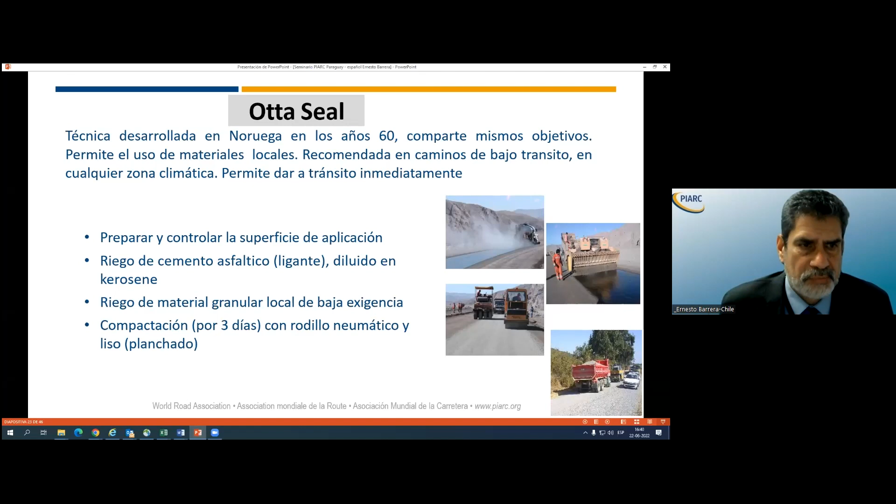We have 3 areas that are limited according to their climate and geographical conditions: the north, where the Atacama Desert is found, the center region, and the south region, where we have a lot of rain and colder weather. So all of these techniques have to be adapted to the geographical conditions.

Ernesto, we're a little bit over the time, so if you can sum up. So this is the last technique, which is for specific cases with specific slopes and curves. These are very special cases.

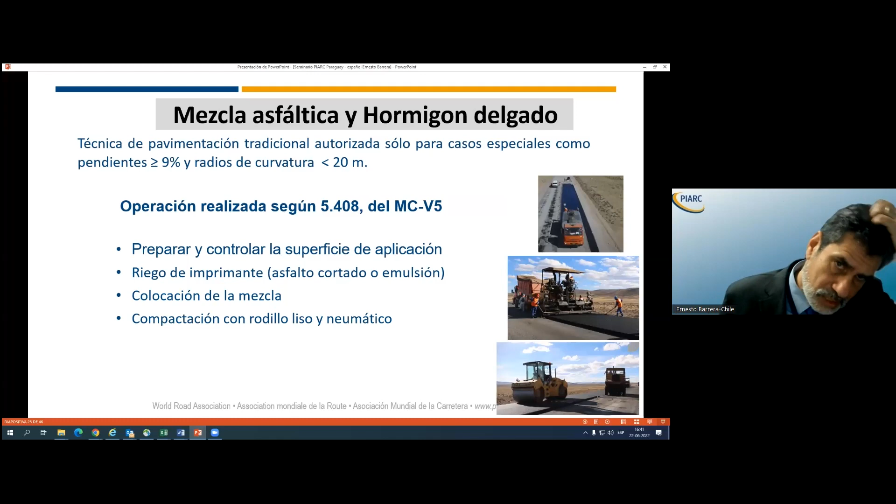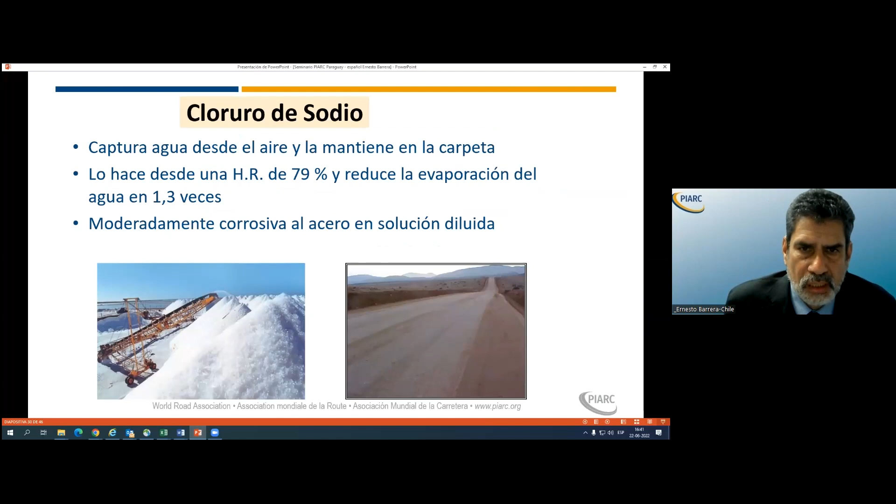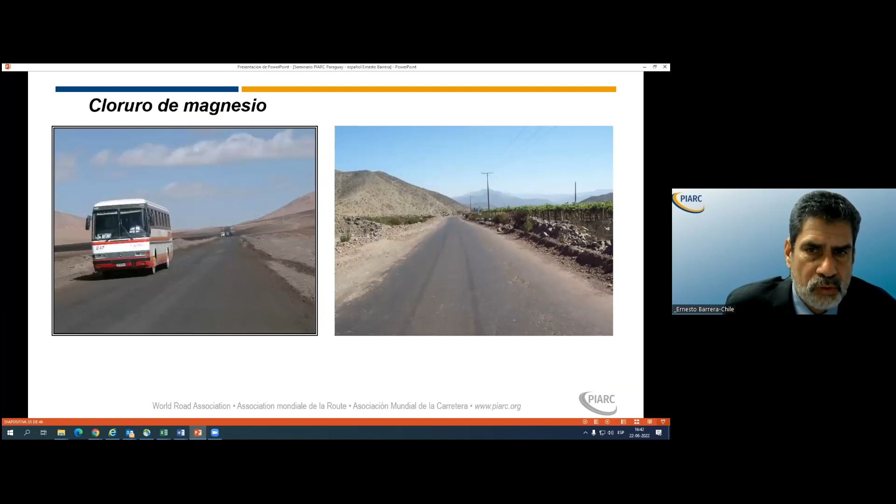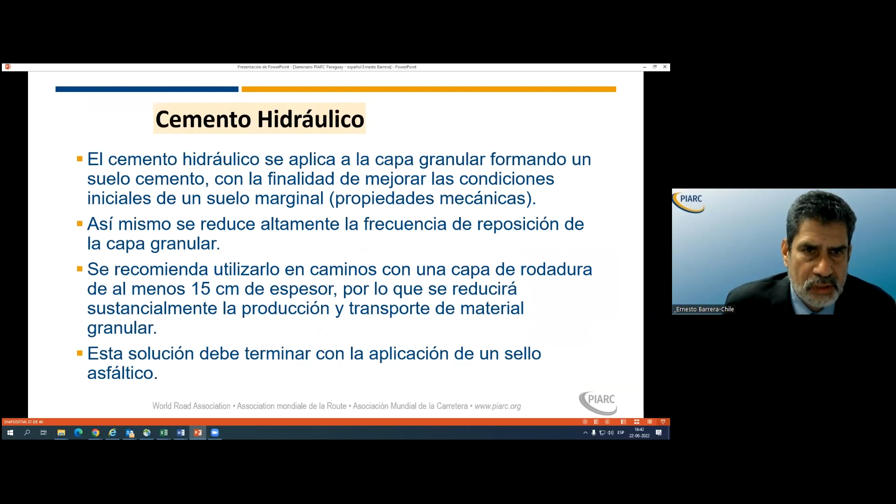We also have solutions that use stabilizers. We have used hydraulic cement, different chlorides. In the north, we have huge reserves of sodium chloride. We have also used magnesium chloride, which lasts for 2 or 3 years and has been very useful in the northern part of the country. We have also used hydraulic cement, and we mix it with granular material. We are doing that now, implementing some recycling techniques.

With our basic road programs, we have been able to decrease the frequency of the times when we needed to do preservation. We have improved people's quality of life by diminishing dust. We have improved local development by developing agriculture. We have also improved the surface for roads with low density traffic, and we have managed to make the most of the available raw materials around the area so that we can diminish the use of granular material. And it's been a pleasure. Thank you very much, and I'm open to any question or comment that you may have.